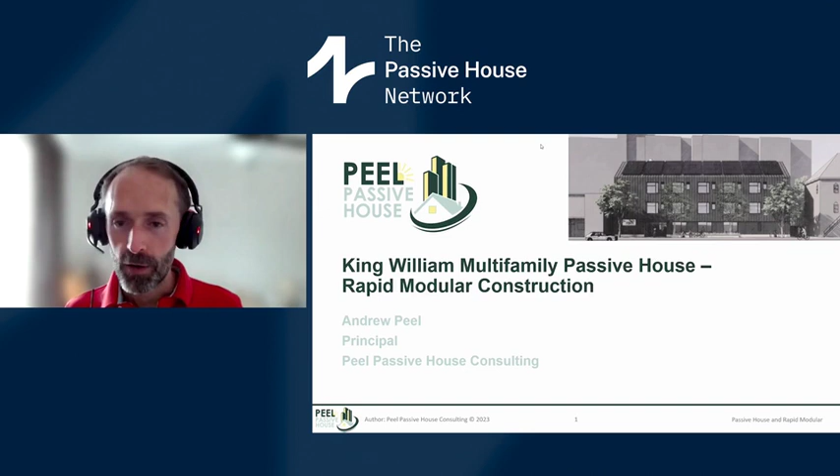I'm Andrew Peel, principal of Peel Passive House Consulting. Just a very brief background on us: basically we're a firm dedicated to the Passive House world in a consulting capacity, such as on this King William project. We're also a building certifier, we do a lot of training, and we've been working with manufacturers to evolve their products to serve a growing Passive House market.

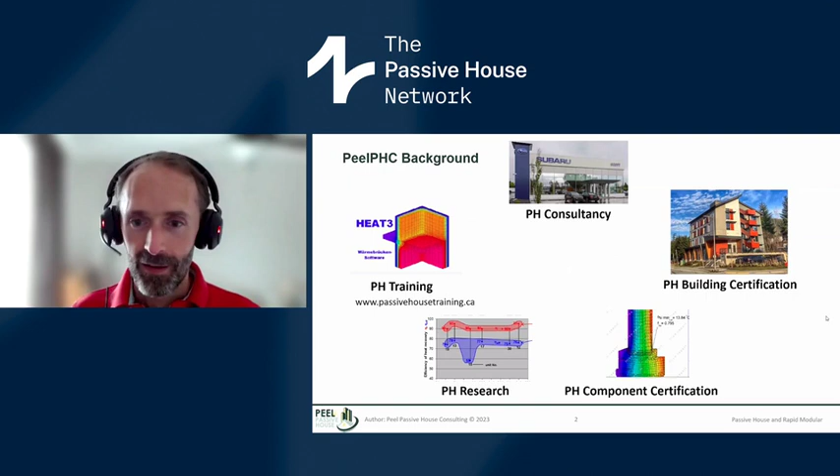So a little background on the project: the client is City Housing Hamilton, basically an organization of the city of Hamilton that provides affordable housing. You can see it's nestled on Lake Ontario, south of Toronto.

This project is a 24-unit, deeply affordable housing multifamily project, and you can see it's about almost 13,000 square feet. Design temperature for reference is actually 0 Fahrenheit. The architect is Montgomery Sisam Architects, a local Ontario architect.

Although I happen to be presenting the project, in terms of the Passive House side of things, I have to give credit to my colleagues, Kelly Fisher and Dave Fraser from my team, who were the main folks driving the integration of Passive House into the project. I get the privilege of presenting this project.

This project was part of what's called the Canada Mortgage and Housing Corporation. It's a federal government agency that provides financing, grants, and funding to projects, both affordable housing as well as market. They developed a rapid housing initiative because there's a dire need for housing, particularly affordable housing, across Canada, and they wanted to deploy a larger number of units quickly.

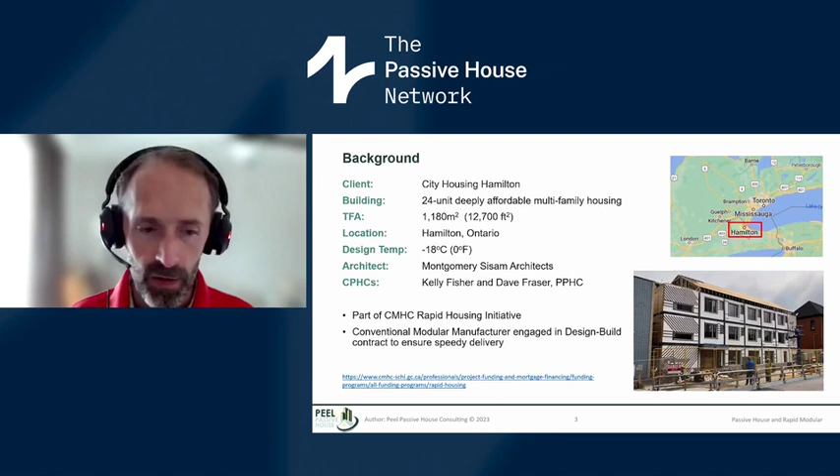For those who are interested, I've included a link to the program if you want to find out more. I'm not going to spend much time on the program itself, but the link is there for reference.

Okay, so just a bit of background on the design. It's a 3-story building with a crawl space underneath, and you can see the outline of the thermal envelope, which includes the crawl space. This happens to be ideally oriented north-south, just how the available site was laid out. You can see the south facade there, and the east facade there as well, with limited windows.

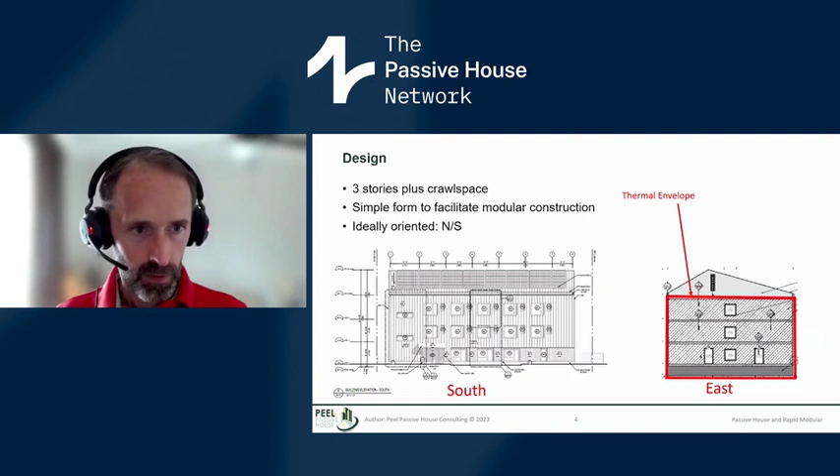There are some non-straight sections of the building, as you can see—for instance, a bump-out for the elevator. Also, the module with the entrances to the building is a bit shorter, but essentially everything's kept rectangular because it's modular, right? It's done in 3D, so we need to keep to a certain set of dimensions for the modules.

And I mentioned the crawl spaces within the thermal envelope—this was mainly so that we could run pipes and ducts that would be accessible for installation and any future work if needed.

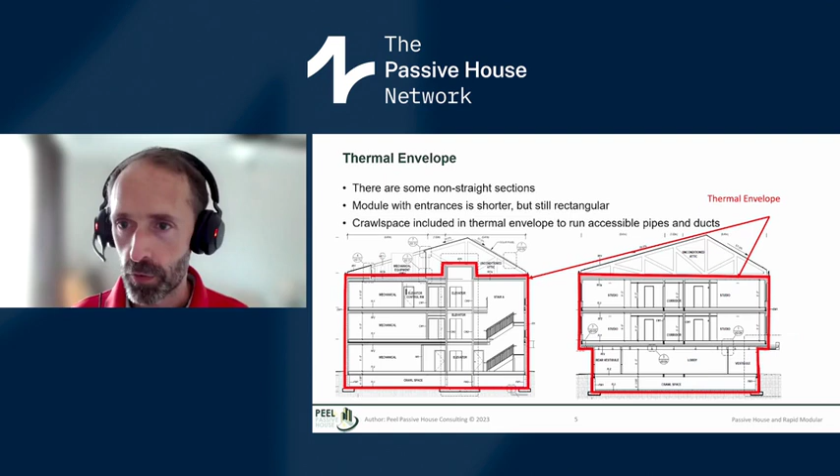Okay, in terms of the layout of the modules, there are 21 modules in total, 7 per floor. The way the floor layout works, we actually have 2 suites per module, split by an interior corridor. You can see the studio up here—this happens to be the ground floor with some amenity space.

There aren't actually dual suites within a module, but you could envision the studio module here flipped on the other side—they're all studio.

You can see they're quite compact. Again, this is deeply affordable housing, looking at rehousing homeless folks and people who are precariously housed—so it's a certain market segment that this type of project is actually serving.

The module widths vary from 10 to 14 feet, so fairly narrow, as you can see. From a shipping perspective, the modular manufacturer has indicated 12 feet is ideal, and they try to create as many of the modules as possible at 12 feet.

In this case, based on the design requirements and the service needs of the building, we ended up with a 13-foot wide module.

And then 14 foot for the space with the stairs, elevators, and mechanical rooms, and then the entrance one—the one with the entrances—is the narrowest one at 10 feet.

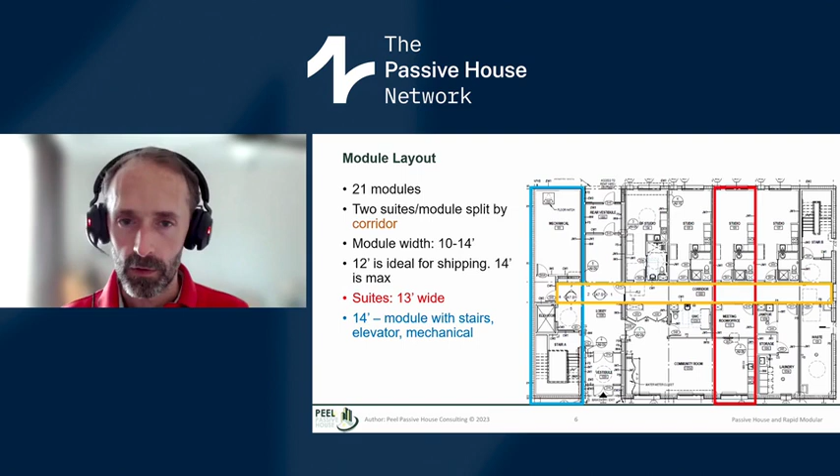As best we could, we wanted to stick with as many of the materials and processes that the modular manufacturer was already familiar with.

They already have their processes, and being a factory setting, they have certain QA/QC processes already, so we wanted to stick with those and just try to embed Passive House into them—insulation materials they're already used to working with, especially the folks on the floor doing the work, membranes, and so on.

Also, the division of labor between what gets done in the factory versus what gets done on site. Not everything can be done in the factory.

Even with modular, we'll see to what extent what was actually done in the factory, but there is a kind of balance between factory and site work.

Now, because these are modules and they're going to be transported, they actually have certain structural requirements. There's actually a separate CSA standard—anyone familiar with the Canadian Standards Association knows there's a separate CSA standard for this.

This applies to homes that are basically allowed to be transported as a home or part of a home. So we actually double up our ceiling and our floor—there's a ceiling and a floor per module, which obviously increases height but also adds extra timber.

But if you think of something with greater structural capacity like mass timber, the amount of timber used here is certainly a lot less than using mass timber. However, this extra timber does add extra cost to the modules.

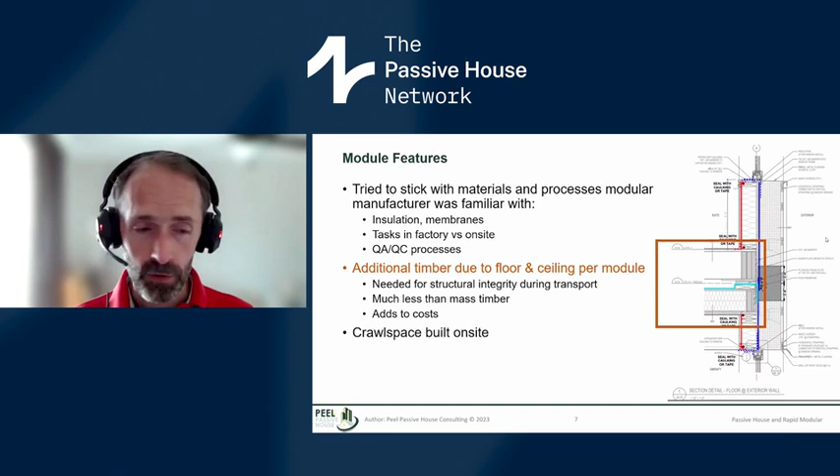The modulars, although they're very narrow, are actually flexible in terms of how you create space. You can create one larger space or room across multiple modules. So you can see here on the ground floor, there's a community space that actually spans 3 modules.

They design it in a way that they can have openings in the side walls of each module—they just have to add suitable structural reinforcement to make sure they can transport that.

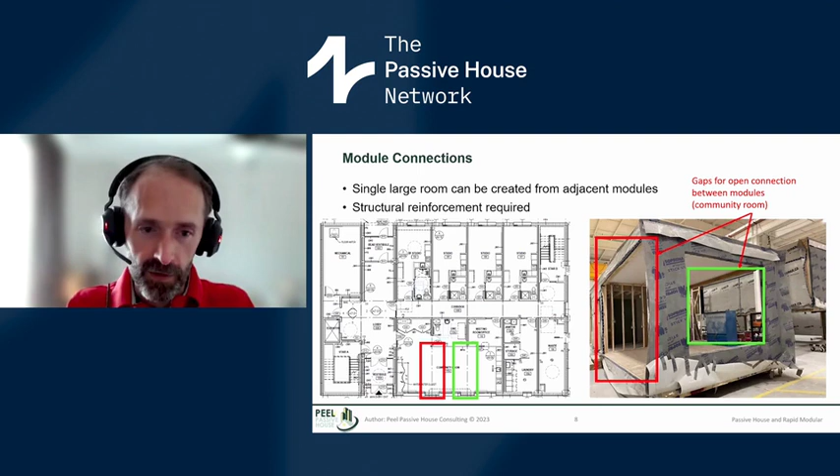So there is some flexibility—you're not stuck completely with narrow studio apartments.

Now, in terms of our planning, there's another layer compared to maybe a conventional Passive House project, because we have the modularity—the factory side of things.

And the on-site stuff. So there's coordination of, well, how do we ensure there's a smooth transition between the factory and the site.

And certainly there's, I'd say, probably more challenges than a panelized solution, where you're doing panelized walls or roofs. There's just an extra level of coordination, I'd say.

And so one of the things we did in planning—everyone knows the red line for your air barrier, indicating where that is. We go further with a variety of different layers to coordinate those, but also to distinguish what's done in plant versus on site.

So we know that the folks in the factory on the floor, they know they can look at this and say, okay, these are the things that are our responsibility that need to be done on site versus in the factory. And then it's clear what's going to be completed on site.

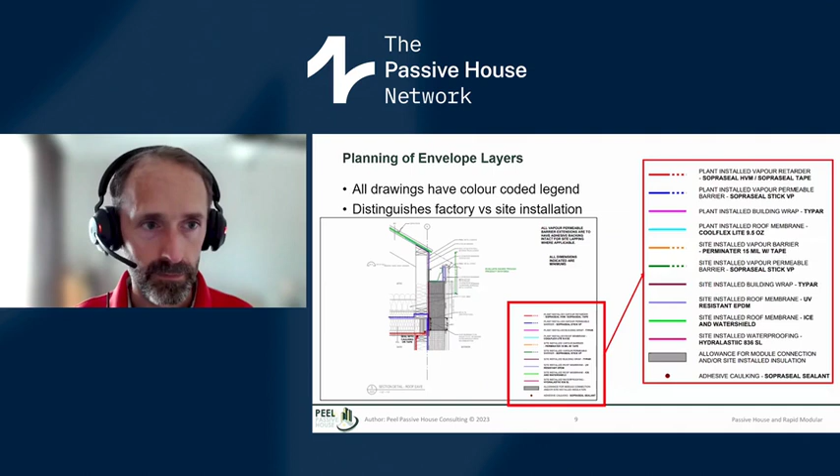One of the biggest challenges with modular is the panel to panel, or more accurately, module to module connection. You've got these modules coming together horizontally and vertically. How are you going to tie those in?

We're trying to do as much in the factory as possible, but we need to ensure that we get a good air seal, weather seal between each module.

So we had to think through this conceptually as well as practically, both in how they work in the factory and then what gets done on site.

The manufacturer can do full modules completed with cladding, delivered to site, which obviously if it's all clad, there's no opportunity to get in there and finalize sealing for air barrier.

So there was back and forth discussion throughout the team, the whole project team.

We landed on a solution where we would leave a section, for instance the area between two modules, where we have the insulation clear and accessible so that we can tie in the WRB.

The air barrier and WRB are one and the same material in this project, so we're able to access that, seal it on site, and then come and finish the installation.

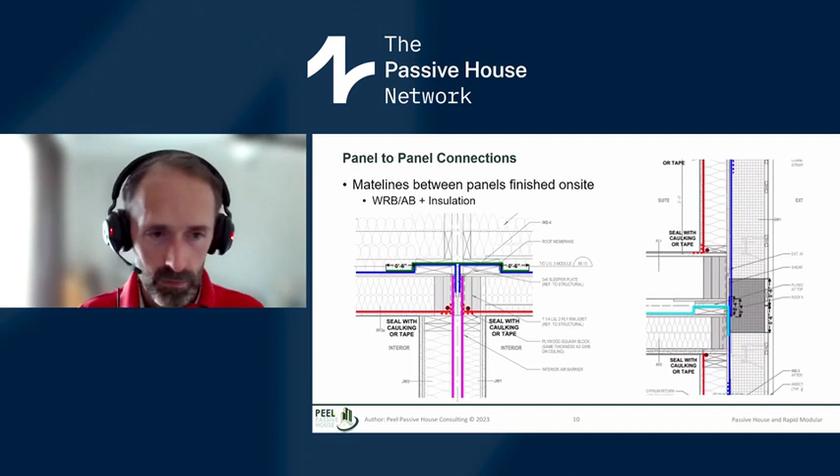We also have the roof matelines as well. You can see a kind of membrane that will come on top of that to seal up the roof after the modules are installed.

In terms of the building envelope solutions, this is the exterior wall, and we delineate what was done in the factory versus on site. From inside to outside, we've got drywall, interior vapor control layer, then our structural layer, 2x6 timber stud.

We use fiberglass batt insulation. Essentially, that's what the manufacturers are used to using, so they didn't want to change insulation.

We used a self-adhered WRB and air barrier on the outside of that. I did forget the sheathing layer in this - there is naturally a sheathing layer there as well that the self-adhered WRB is applied to.

We actually have an 8-inch prefabricated EPS panel, exterior panel, that goes on top of that. It's a PHI certified product. I've got a list of the various products we used on the project for those who are interested, on a later slide.

We actually worked with this manufacturer to help them certify their product, and we've used it before, but not in a modular capacity, so there was an interesting application.

You can see it's probably the cladding solution I've seen with the lowest amount of thermal bridging. It's got an integrated steel track embedded in the EPS layer, and this track is screwed to the wall, and then the cladding is attached to the steel track through a separate screw.

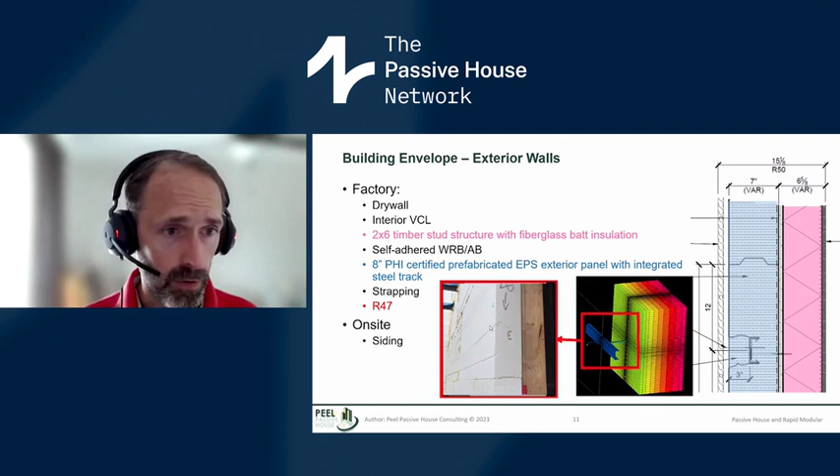Let's look at a couple other components. We've got the roofs. So the main section of roof, basically the structural part, ceiling joists, those are 8-inch joists, filled with fiberglass batts, again what the manufacturer's used to. Then we have 2 sections of roof.

Mostly it's a truss roof, and that's got 11 inches of blown cellulose at ceiling level on site. It's a ventilated, or vented, roof.

So that's our R65. And then there's a section of flat roof that houses some mechanical, like the condensing units, and that has an additional 9 inches of XPS for an R64.

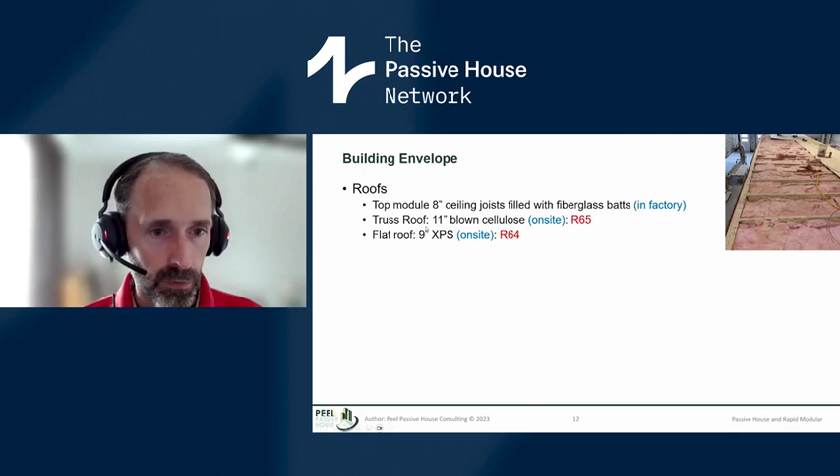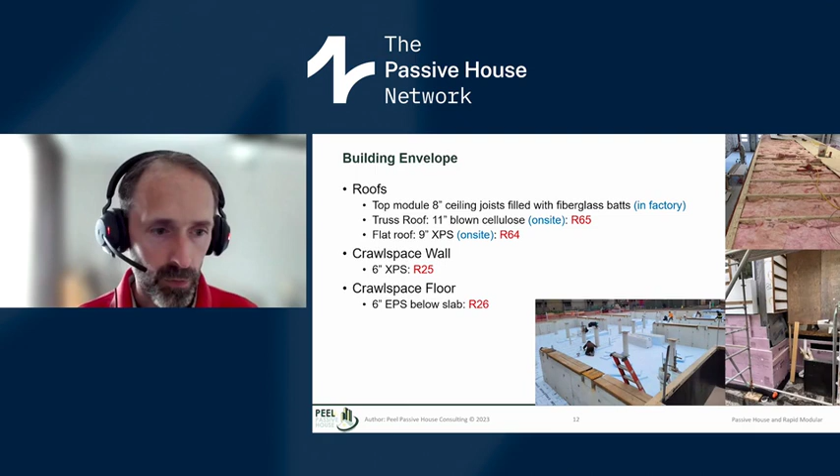Crawl space wall - this was originally spec'd as EPS, and then the manufacturer decided to change that to 6 inches of XPS for an R25 wall. The crawl space floor is 6 inches of EPS for an R26.

Thermal bridging - I mentioned the exterior wall system. So I've got the thermal bridging factor, and it's almost near thermal bridge free. The lowest, again, out of any cladding attachment system we've come across.

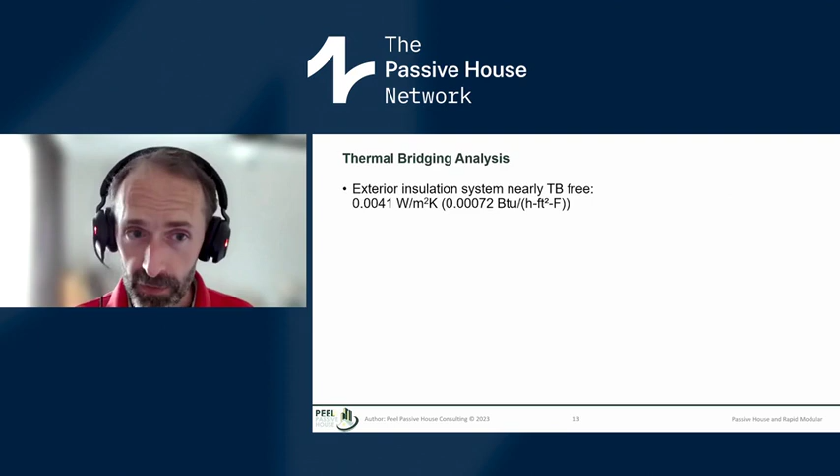And yet, despite using a passive certified system and modular construction, where we think we'll have some repeatable details, there was quite a bit of analysis and modeling we needed to do, which was maybe unplanned for. We figured we're using known systems, but just with the detailing we needed to work out, and it's the first time we've applied it in a modular setting. It was definitely surprising - 28 models in total.

Part of this was to optimize to meet our space heating demand. This project is going for passive certification, so I think there's definitely an opportunity here for some - we certainly learned some lessons through this project, and we could repeat some details. But the question, and this has been on my mind for quite a few years now, is: how many projects are repeating this process of detailing? And there's not a great mechanism yet for sharing details across the industry to really cut a lot of this work out.

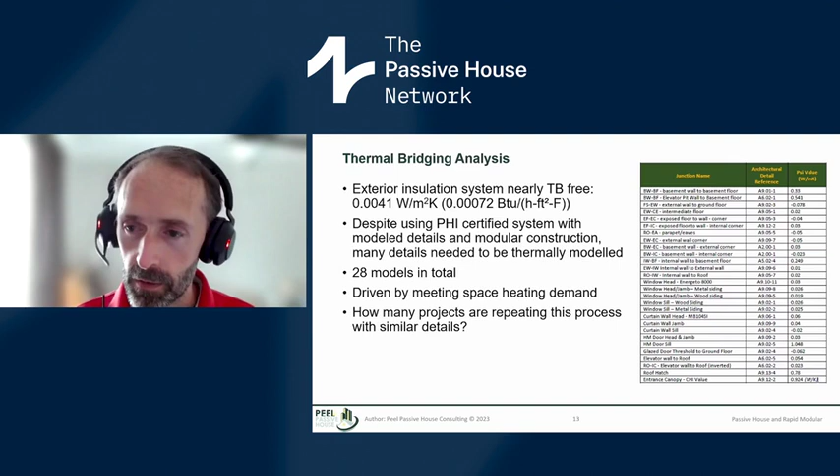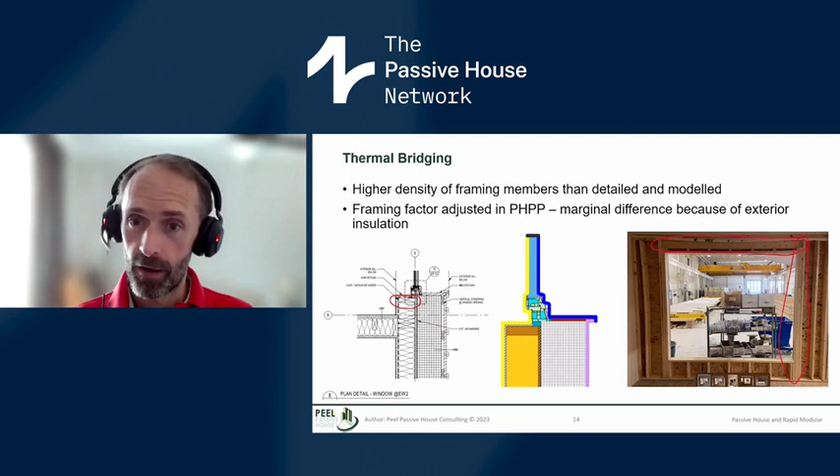And then just some things that come up with the modularity and the structural requirements. We plan out, we detail, we do thermal modeling, look at our insulation detailing, and then lo and behold, now they need to add some extra timbers for structure. Obviously there wasn't full coordination there. So we had to adjust our framing factor in PHPP to account for it. Luckily, with a big thick layer of exterior insulation, this doesn't have a big impact on our performance.

And also coordination with services - so do a thorough review of service penetrations. Again, lots being done in the factory, but there's this site work, a bunch of site work, right? And understanding what needs to be done, and what's important for air tightness, for instance.

So we have an example here of a sanitary duct going under the insulation in our slab, and there's no interaction with the air barrier, so we make sure the team's clear that this isn't something we have to worry about with the air barrier. Whereas we have this electrical conduit coming up through the floor, planned really close to the wall. When you're on site, are you really going to be able to get a continuous seal around that? So, let's go back and revise some details. These penetrations are definitely important.

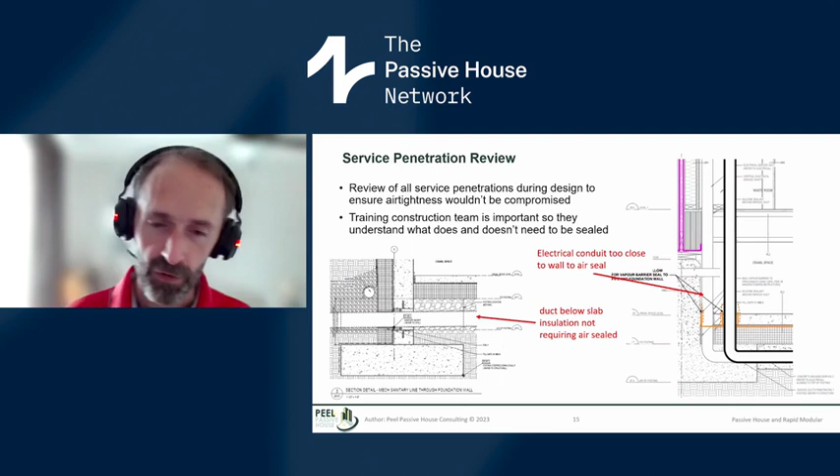And this isn't necessarily very specific to modular - it's kind of reinforcing a message here. But it's easy, as we'll see, because there are actually different teams working in the factory versus on site, so these things can easily be missed.

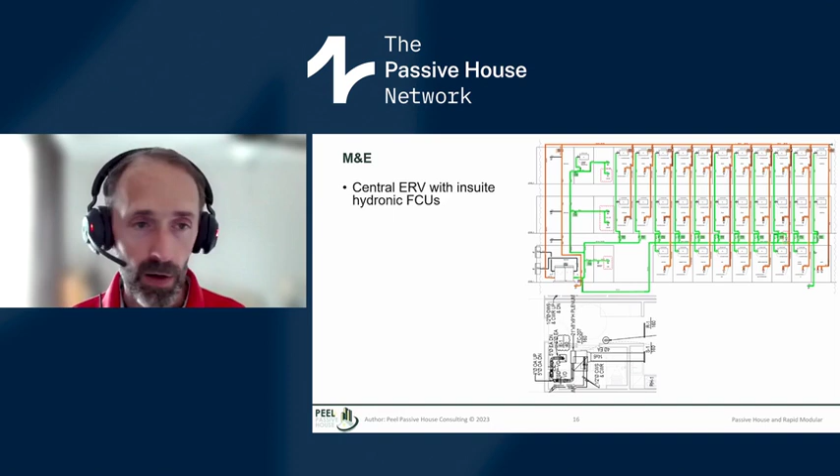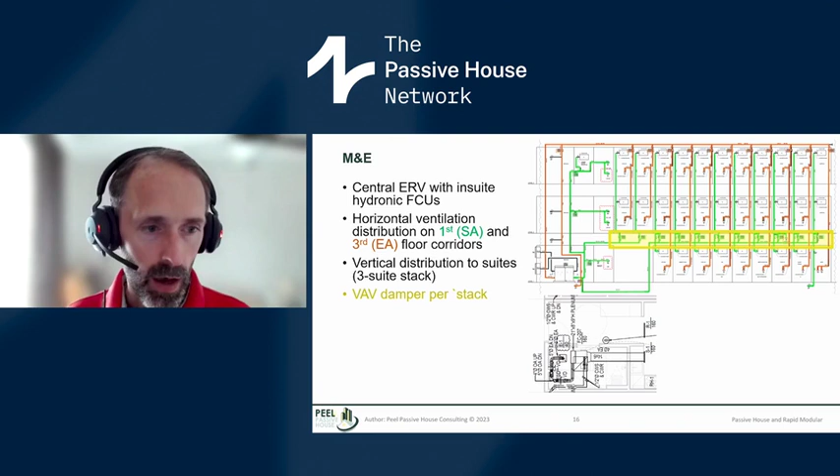In terms of our M&E strategy, it's a central ERV located in a mechanical room on the ground floor, and there's in-suite hydronic fan coil units, so each suite has a fan coil unit. The distribution has horizontal distribution on the first floor for the supply air, and then on the third floor for the return or extract air. Then we have vertical distribution through the stack - each stack of 3 suites has a vertical shaft that feeds each suite. We also have a VAV damper per stack to have some level of controllability of ventilation rates in each suite.

With the fan coil units, generally what we try to do is duct our ventilation air separately from the fan coil, so ventilation air just comes into the suite continuously with no interaction with the fan coil unit. The engineer basically wouldn't accept that as a solution, so they ducted it into the return air of the fan coil unit. This is a very common practice.

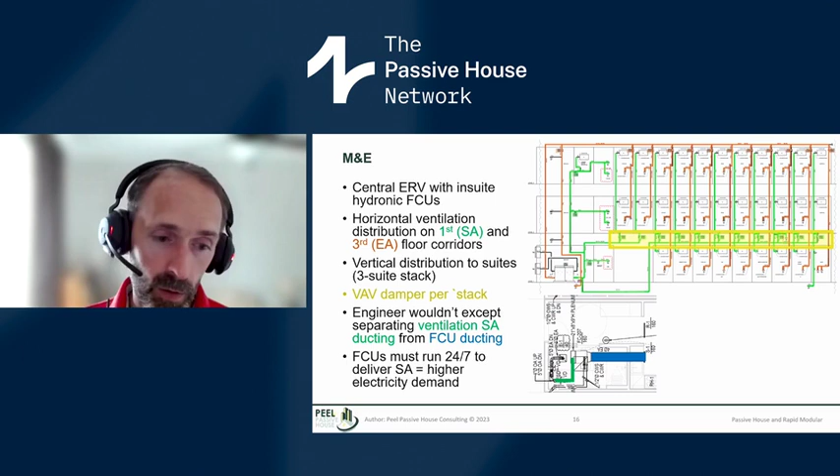The challenge there, as we know, the loads aren't very great in Passive House. We're not running the fan coil unit all that often, but we need to run the fan in order to deliver the ventilation air into the suite. So what we end up with is a bit of a parasitic energy load where we have to run that fan coil unit 24 hours per day, but maybe half the time, who knows exactly how much, but quite a bit of the hours of the year we wouldn't actually need to run it, but we do in order to deliver ventilation air. So definitely a suboptimal solution there.

In terms of the component breakdown, I won't spend a lot of time on it. Numerous of you out there will be familiar with some of these products for sure. But it's all electric, right? With a chiller, we've got a CO2 heat pump.

The odd thing, and this is another engineer-driven thing, we would have used an air-to-water heat pump to provide heating and cooling through the heat pump, but the engineer didn't want to do that. They just wanted to have a chiller. So we have electric heaters inside of the fan coil unit. It's a bit backwards in my mind - I've got electric resistance heat. So, yeah, another suboptimal point, but not something we could move the engineer away from, unfortunately.

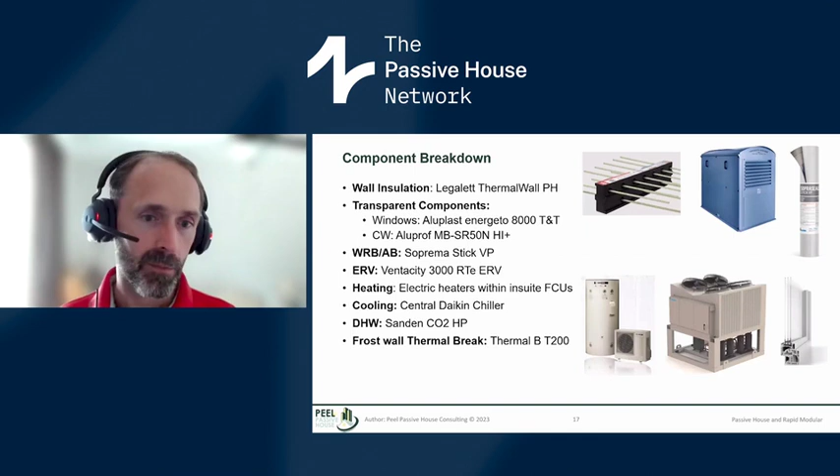I wanted to point out our energy modeling approach, which we've been evolving over years to streamline the process. We've developed a pretty streamlined method, though there's still more optimization that could be done. We bring in a model from Revit, a 3D CAD export, into SketchUp, build a design PH model around it, and export that to PHPP. This works great for our internal workflow and also for certification as a way of documenting the project. It's a clear connection between the architectural model and the PHPP.

My colleague Kelly, who I mentioned earlier, will have already presented at the conference in an earlier session entitled 'Making a Better Crystal Ball.' If you have the opportunity to watch that, I'd definitely recommend it—she gives a bit more detail on this process.

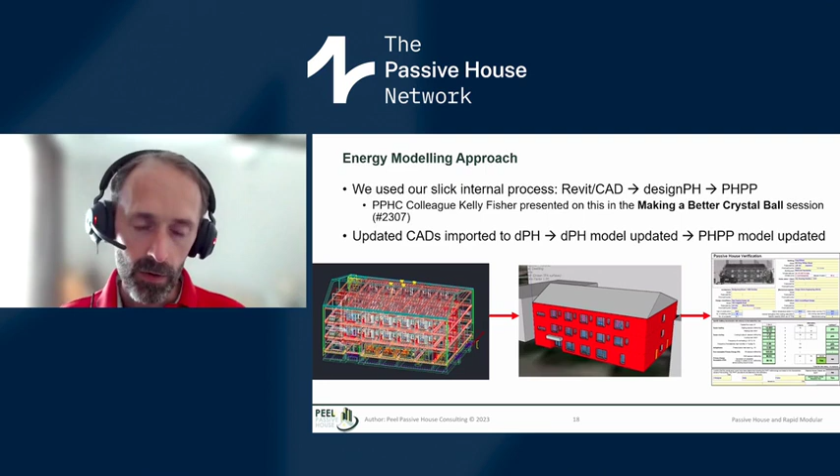What we can do is, if there are updates to the CAD or Revit model, import that into SketchUp and identify where the changes are, then make the updates in designPH and export that into PHPP—instead of trying to figure out what's changed, which architects may tell you, but they may not tell you everything.

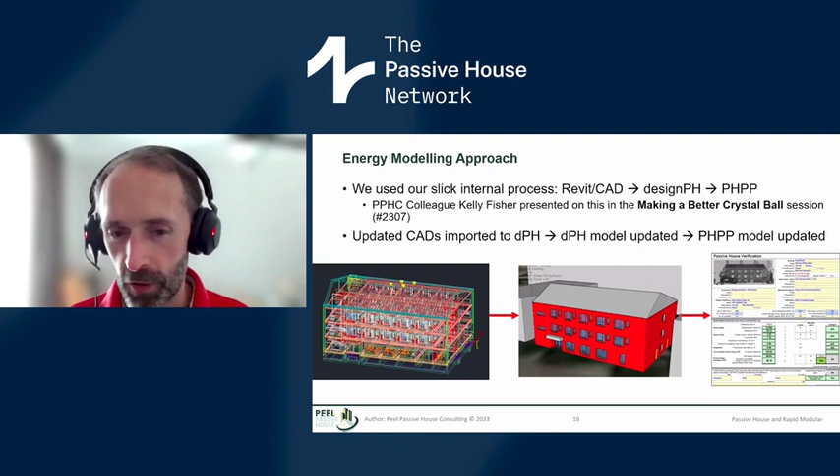A key thing on many projects is ensuring the team understands Passive House requirements and processes. During the design phase, we provided virtual Passive House training for novice design team members who hadn't had any Passive House experience, including on the modular production side—like the production manager—so they could understand Passive House and provide feedback as part of the design team. It's like, 'okay, this is how we do it in the factory—how's that going to influence our design?'

We also provided in-factory Passive House training, a day-long session for key shop personnel prior to work beginning in the factory. One thing that was amiss on the project relates to how it's set up for construction—the modular manufacturer is the prime on the project, leading everything and hiring the architect and consultants, but they also contract the site work to a separate GC. That constructor had no Passive House training, which certainly caused some issues. That was a gap in the team's knowledge, and an oversight on all our parts to not include them in the training.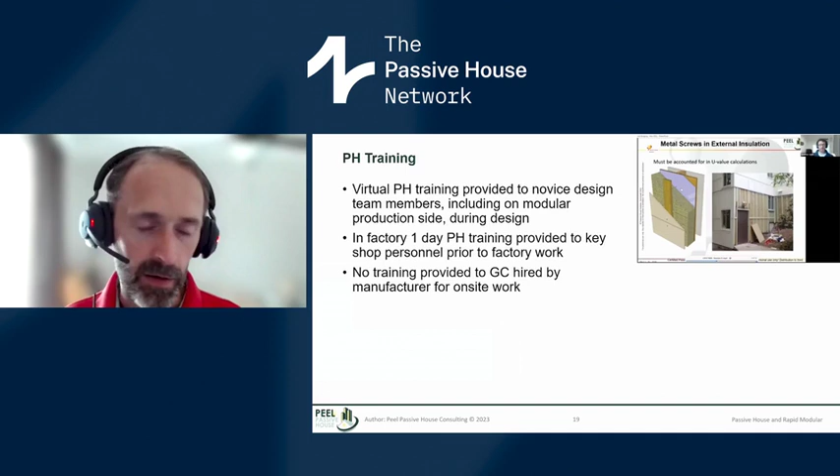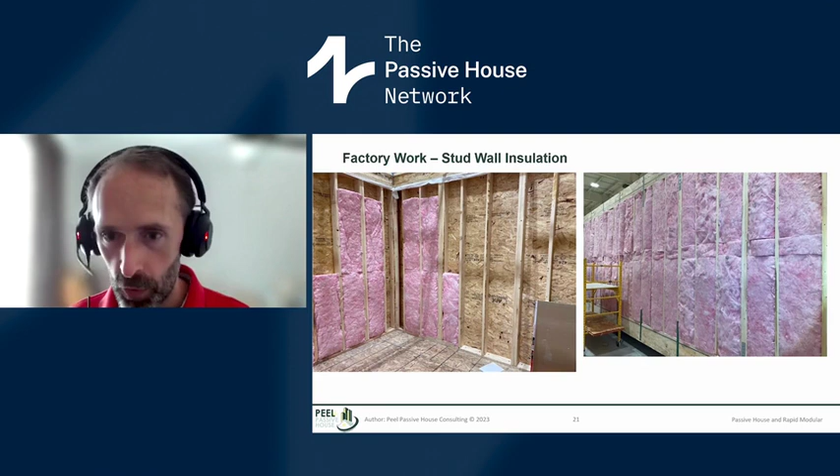In the factory, here are some highlights. Their conventional approach uses fiberglass between the studs, so no change there for them—nothing special, though obviously we want to make sure the cavities are fully filled. Here's a look at two sides of different modules to give you a sense of things.

You can see here the Soprema product, which represents the exterior wall—that's our WRB. This is a demising wall between suites, which is also wrapped, which is interesting. You might wonder why you'd wrap that—well, one, they compartmentalize every suite, so that provides compartmentalization, and they also use the wrap for temporary protection as they're moving modules onto the building site.

Our strategy to make the mate lines between modules work involves overlap of membranes. We try to ensure that in certain sections where it's a bit questionable, we go back and address that, but we have enough extra membrane along all edges to overlap the modules, both horizontally and vertically, on site. You can see here on the exterior wall, it's just a typical WRB wrap.

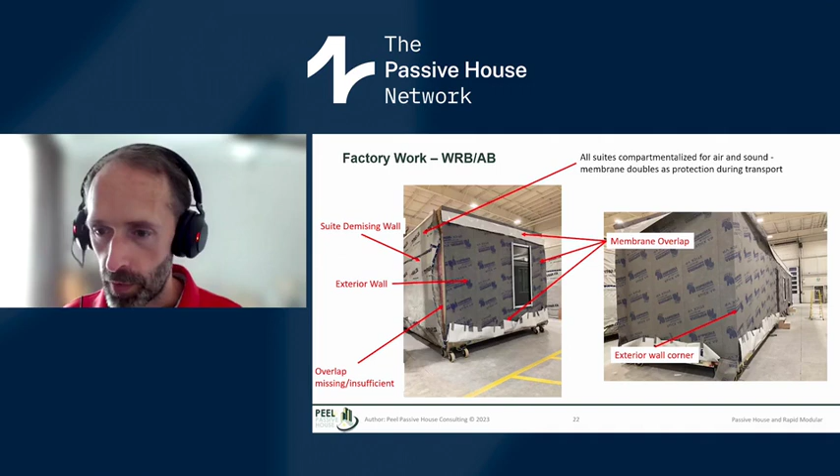Window detailing—there were some issues here, which came down to miscommunication about the order of operations and what the requirements actually were. We have our sill flashing here, which happened to be applied all the way around the window.

Waterproofing flashing was intended just for the sill, but in terms of order of operations, they actually put the window flashing on first and then overlaid the WRB over top of that. So again, there's a bit of a misunderstanding on the purposes of the membranes. In terms of detailing, the window actually sits slightly cantilevered, or proud of the stud wall, to get it a bit into the exterior insulation layer.

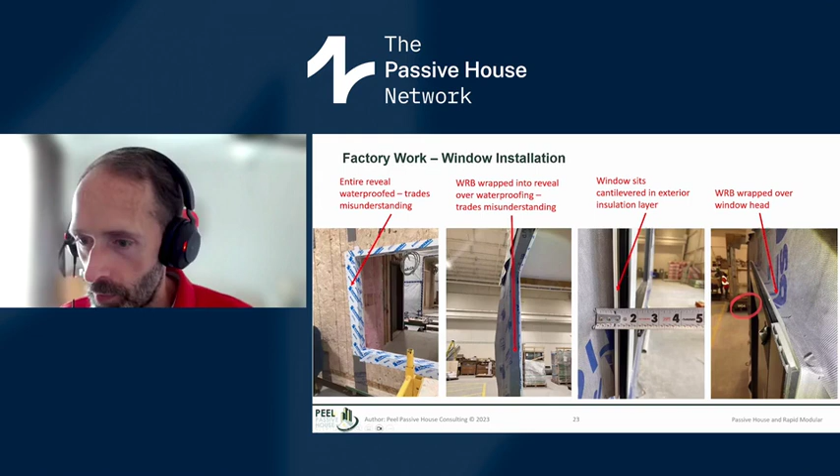I can see your detail of the WRB wrapping at the window head.

The windows were also installed in the factory, and after they'd done the first mock-up, we had a third party come in and do a seal test around the window, and it passed with flying colors. It might be difficult to see in the picture, but they're using a smoke pencil, watching that the smoke is basically floating around, not being sucked in or blown away from the window. That was our one window mock-up.

They weren't going to be testing every window, so the manufacturer's QA/QC processes are critical to ensure all these windows are replicated as such. The factory build can go quite quickly, so you're not necessarily getting a third party or other project team member in to check the consistency of all the windows, so the manufacturer's processes are quite critical to this.

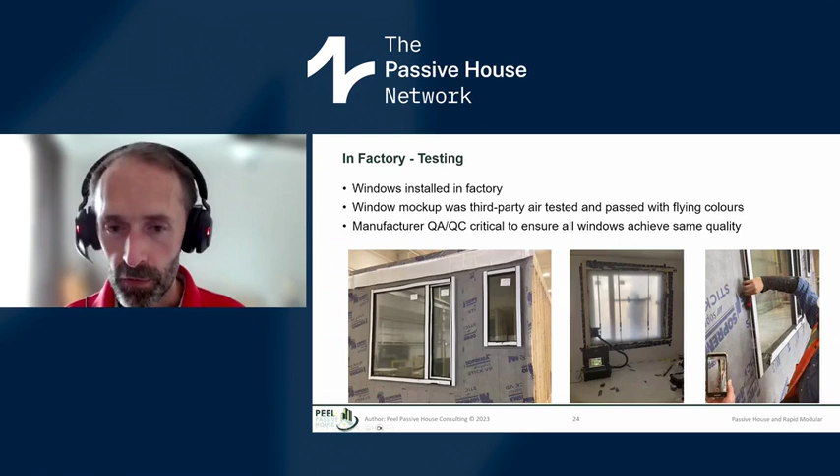Then some other miscellaneous details: a lot of the mechanicals were installed in the factory, so you can see the piping and duct work here. I wanted to highlight this because it's often missed on passive house projects - we have pipe with a thermal bridge-free hanger, with insulation, and the hanger separate, so they can continue the insulation all across the pipe, which is wonderful to see. Here's an example of a VAV box installed in the factory.

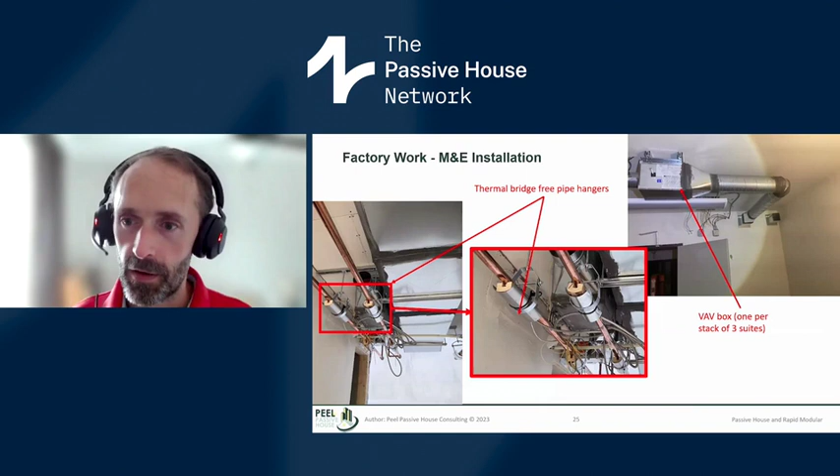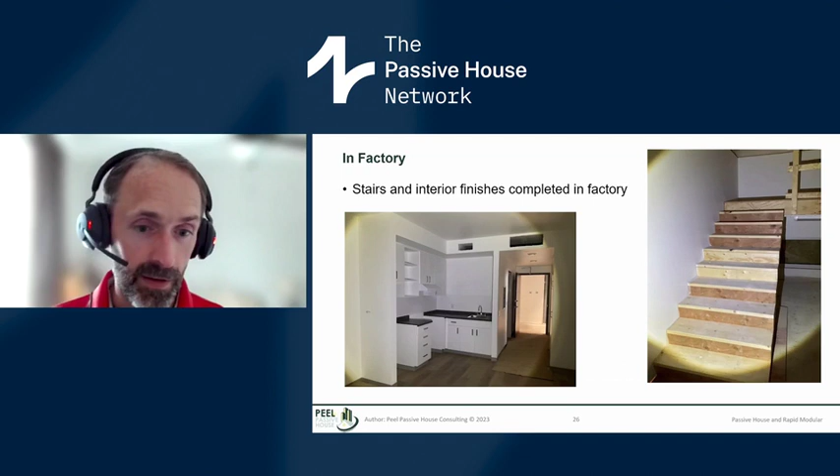Even the interior finishes and the stairwells and stairs are actually installed in the factory. The idea is to basically minimize as much as possible the site work.

Just a little insight into the actual process or work in the factory: the modules are put on wheeled elements, not lifts per se, so they can move through the factory. They have a whole process - I think they have four lines in the factory, so four modules can be worked on at the same time, with stations where they can lift up the modules.

This is actually great for the workers - plumbers, electricians, instead of bearing down the whole time, are actually able to work from below. They found that from a worker health and safety perspective, or a kind of longevity of work, that works well for them.

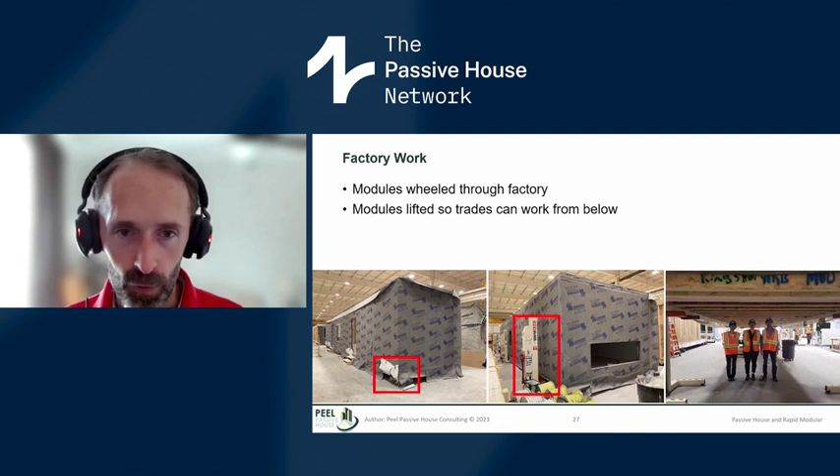Then some insight on the on-site side of things. One thing that got missed during design: we had where the sewer invert was, with a long sanitary pipe running the length of the building. We ended up realizing this was going to penetrate into the insulation layer and be awkward to lay out, so we had to make sure we added extra insulation below the pipe, because it was higher than planned.

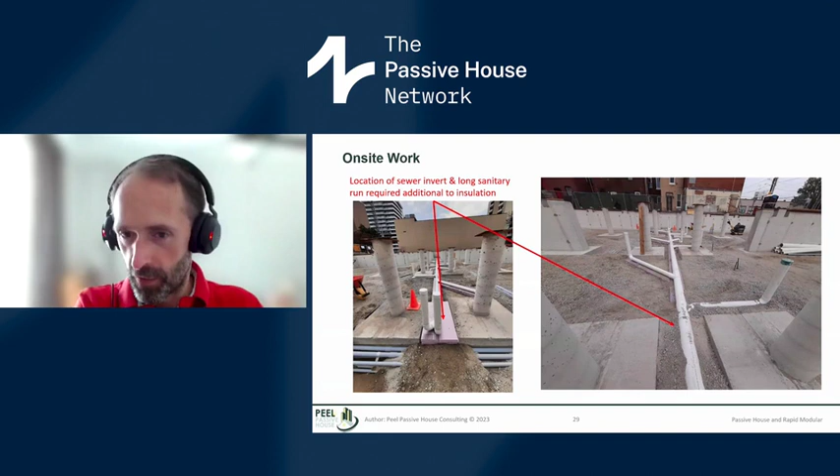Actually, I think the other end was lower than planned. So we just needed to make sure we were getting insulation underneath all of that pipe, and not getting any major breaks in the insulation all along this pipe.

Here's the crawl space being constructed. We do have some thermal bridging, both point thermal bridges with these columns as well as supporting structural walls. The engineer didn't want to put any insulation underneath the footings - I'm not sure exactly why, whether that was soil conditions or something else - so it's just something we had to deal with in the energy model.

And then the crawl space wall was actually insulated after the modules were installed.

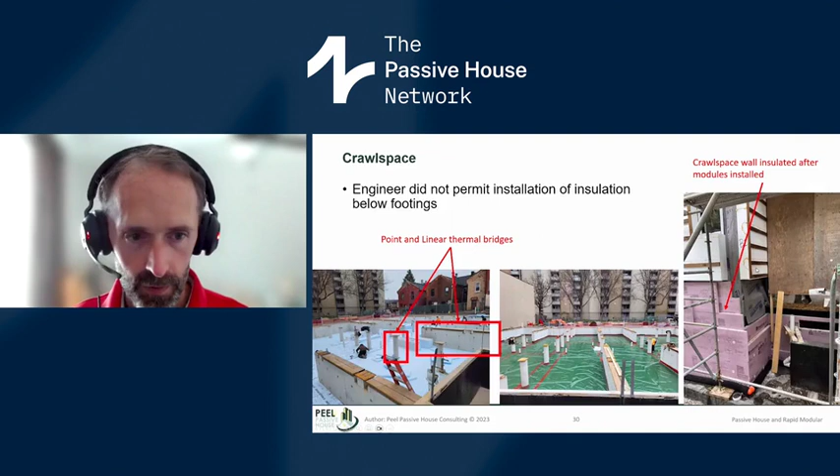Here's just an overview - they had a little time-lapse camera on an adjacent building from the start, once they were ready to bring modules in. You can see the first module coming in here, ready to be craned on site - that's day 1 of our module installation. You can see what they've done by the end of day 1 through day 4, and then by day 4 they had all the modules installed, as well as some of the roof trusses laid out.

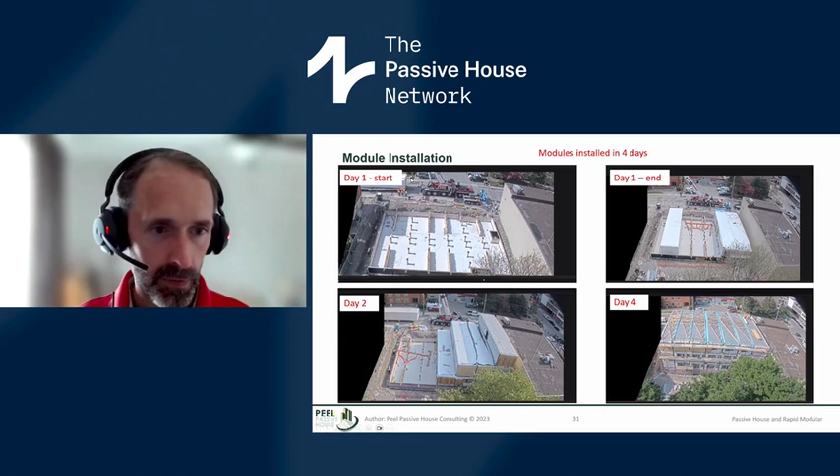One of the interesting things that came up during factory production was we have EPS on the outside. They shrink wrap every module before shipping to protect them from weather, and they keep them shrink wrapped until they're ready to bring them onto the building. But they couldn't shrink wrap exposed EPS, it would melt. So what they had to do is temporarily cover the EPS with some OSB to be able to shrink wrap it. That OSB is removed later on when they're ready to apply the cladding, and I've got some photos showing that.

They also have some membrane on the roof for protection, so this could be like an EPDM membrane, so that if a module is left exposed and it rains, it's protected as well.

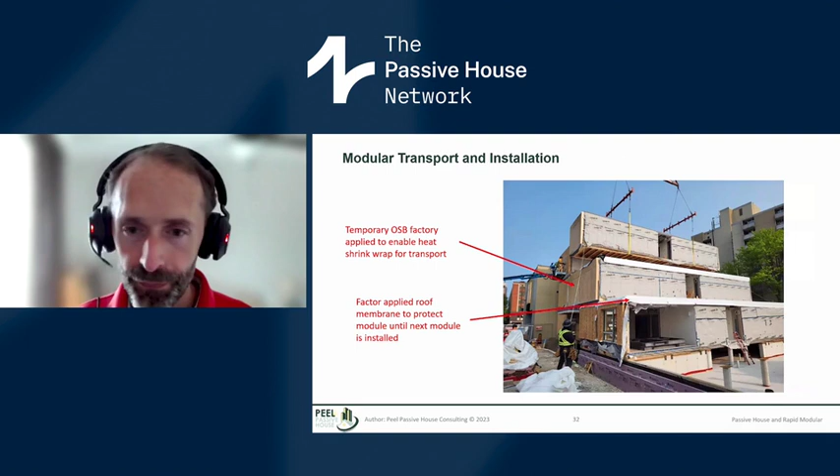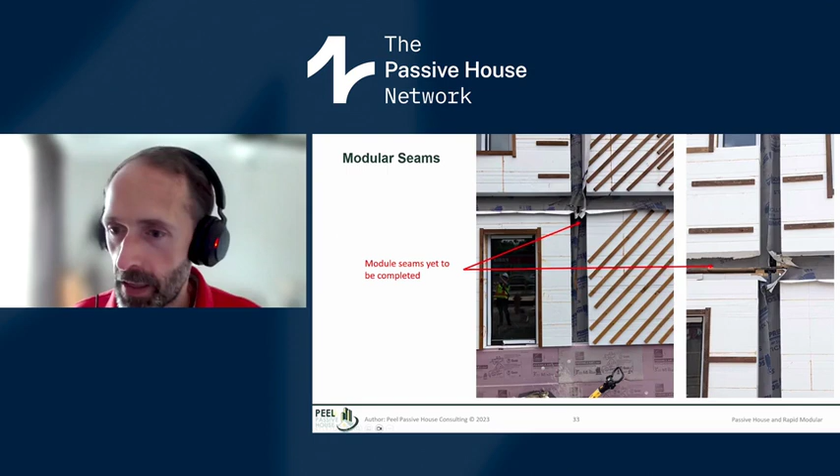Here's an example of our modular seams, not completed. So modules are installed, but they obviously need to go back now and, as planned, finish those seams.

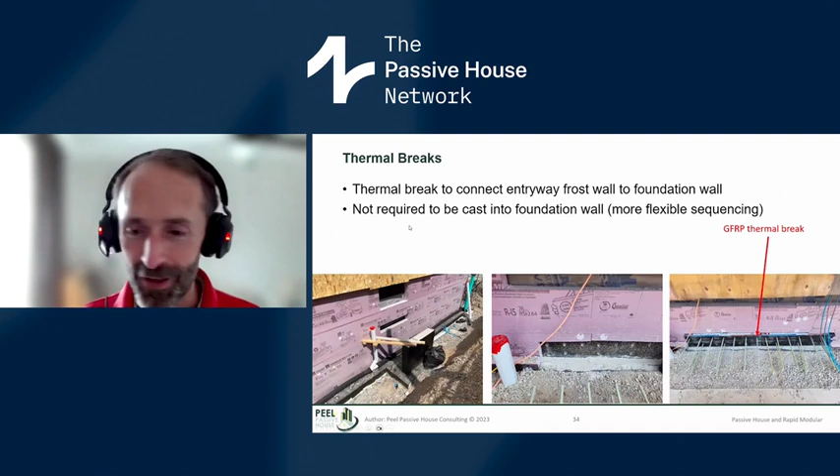Just a little note, we didn't have much thermal break, just a couple at the entrances. We've come across a newer product for thermal break that's GFRP reinforced. A nice thing about this product is we don't need to cast it in the foundation wall. We can have the wall built, then drill into that and place this and cast it in at a later point. From a sequencing perspective, because of that, the foundation wall was done and they hadn't ordered this product, we were like, oh, what's going on? They said, no, it's okay, we can add it in afterwards.

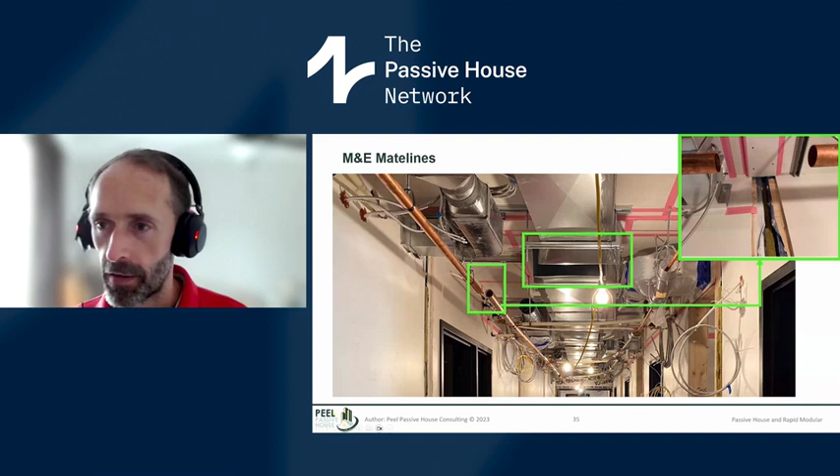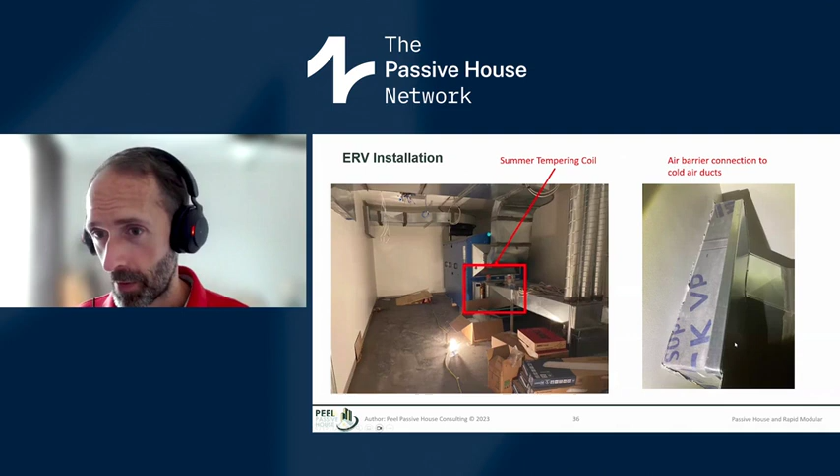ERV installation, this is the room. It's pretty straightforward, they do have a coil. This is another odd thing with the mechanical design, we have cooling in each suite, but they decided to have a cooling coil at the ERV as well, bit redundant I think. And then we're making sure that our exterior cold air ducts do connect with our air barrier as well, for continuity of air barrier.

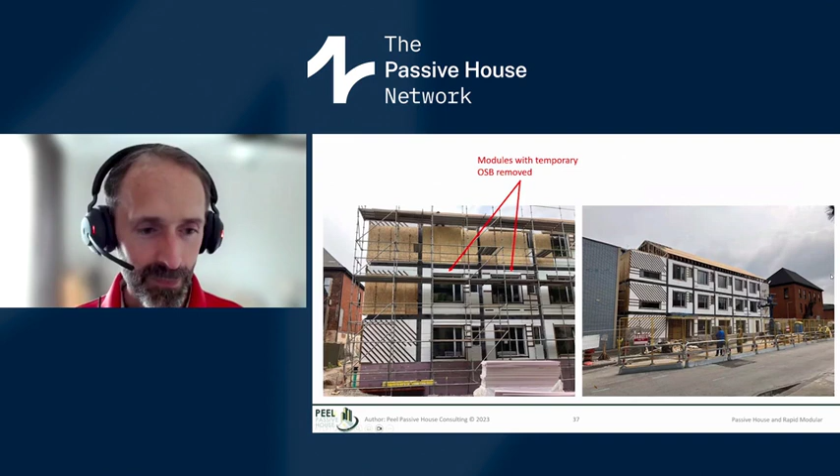Here you can see the difference between the OSB that's still covering the EPS on some modules, and then with it removed. This project was meant to be finished a while ago, and unfortunately, as of this date, it's not finished, so this is the latest photo I have of the project. Hopefully by the time this airs, we'll have it completed.

Just some summary notes here with coordination. One of the things we didn't appreciate is the modular manufacturer had quite a high turnover in the shop. Numerous workers aren't highly skilled and tend not to stick around often. Plus, the important passive house information wasn't consistently and universally communicated to the trades folks, which led to some misunderstanding of requirements, as we saw with lapping and order of sequencing for membranes.

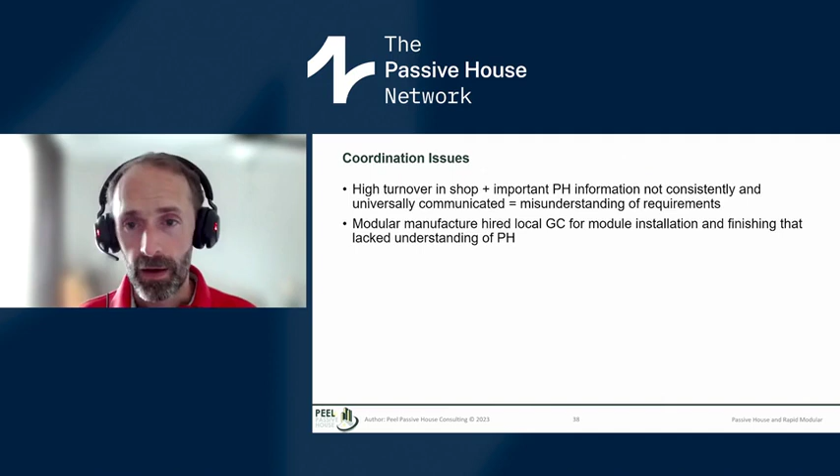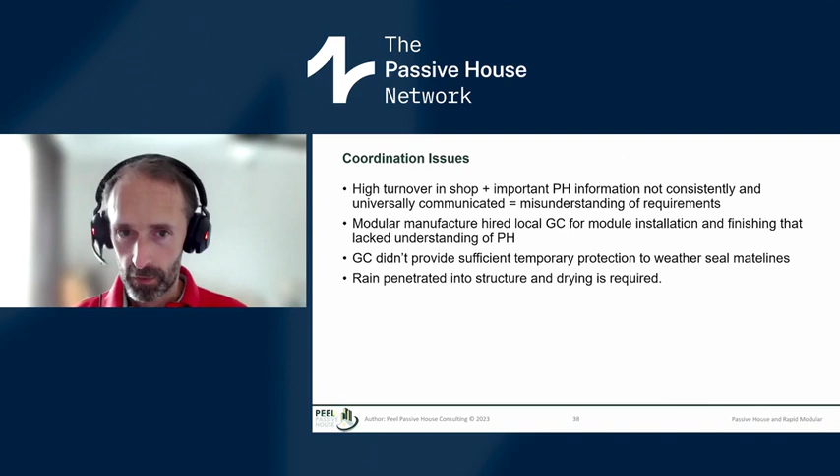The modular manufacturer hired a local GC for the modular installation and the finishing, and again we didn't train them, they didn't have an understanding of passive house. That proved problematic, because one of the things they didn't fully appreciate, even though it was communicated to them, is that the mate lines need to be sealed right away once the modules are in place. That wasn't done, and unfortunately we did get some rain penetration into some of the modules, so they've had to work to dry that out. It's a clear coordination issue that's come up, unfortunately.

In terms of lessons learned, modular passive house is an emerging area but not yet huge. We're still developing details, but we really need to establish repeatable details that are widely applicable.

So we don't get every team reinventing the wheel over and over again, we need input from a passive house contractor. The modular constructor knows their thing, but there's sometimes a disconnect with the site work.

To some extent we can use existing details, particularly passive house certified systems that have thermal bridge modeling done, but those have needed to evolve.

So there's work to be done to transfer lessons learned, or more than that, just detailing across the industry. This has been missing, and I've been wanting this for a while, and I know others have, but it hasn't happened yet.

So this is another call to action: creating a central database of passive details and thermal bridge models. We're basically spending a lot more time in design than we need to, I think.

If we want to scale passive house, even in a modular context, this is clearly important, and it's not being done to a sufficient degree.

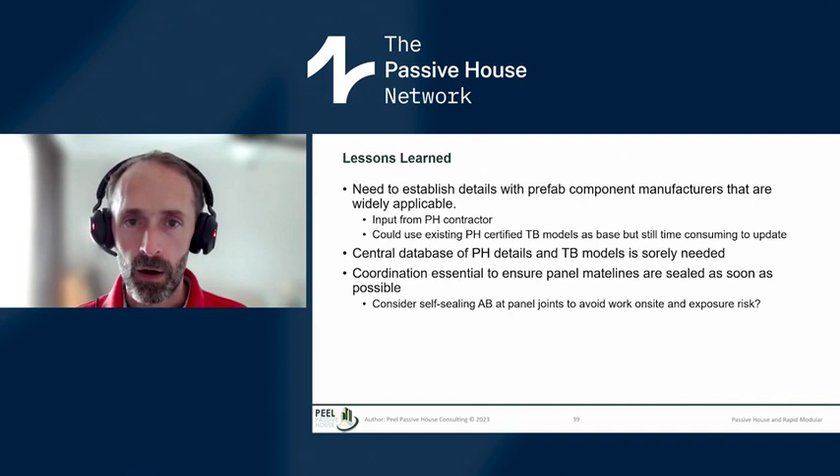We don't need to do extra on-site work, limiting this exposure risk. I don't have a specific solution for that, so it's another call to action point, but it's something worth investigating.

And really, passive house training for everyone involved — we missed the GC crew unfortunately — as well as a turnover plan. If we're going to have high staff or tradesperson turnover, we need a plan to deal with that.

It's an interesting thing because we've had numerous activities in the prefab space, particularly around prefab panels. Often what I've seen is somebody new coming into the market saying, 'I'm going to create a new passive house panel,' starting from scratch with passive house in mind and designing everything around that.

But it's very different to take a conventional prefab manufacturer and upgrade their processes and skills to get to passive house. It's like taking an older tradesperson who's been doing it for 30 years — changing their methodology and thinking can be challenging sometimes.

So it's maybe a bit of a different thought or approach needed in trying to bring conventional prefab manufacturers into the passive house space.

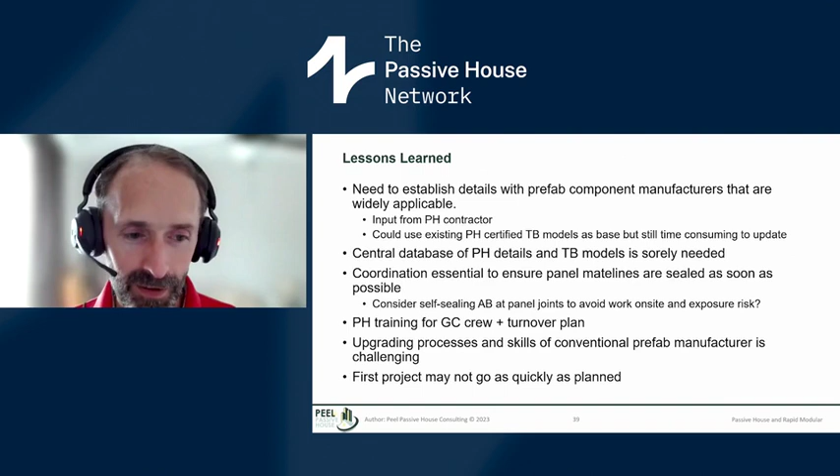And on the first project, even with rapid modular construction, it may not go as quickly as planned. This was intended to be completed and occupied a little while ago and still isn't done, so some challenges there to overcome for sure.

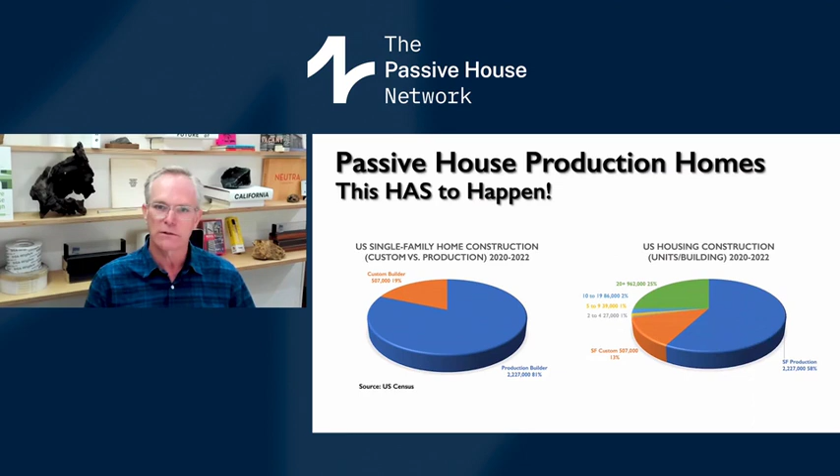We'll talk about the economic challenges and opportunities here, but this isn't something we can ignore if we're going to get our built environment where it needs to be in terms of sustainability and performance. In terms of economics, the huge challenge with production building is first cost, because it's a very competitive industry and sale price really drives a lot of it.

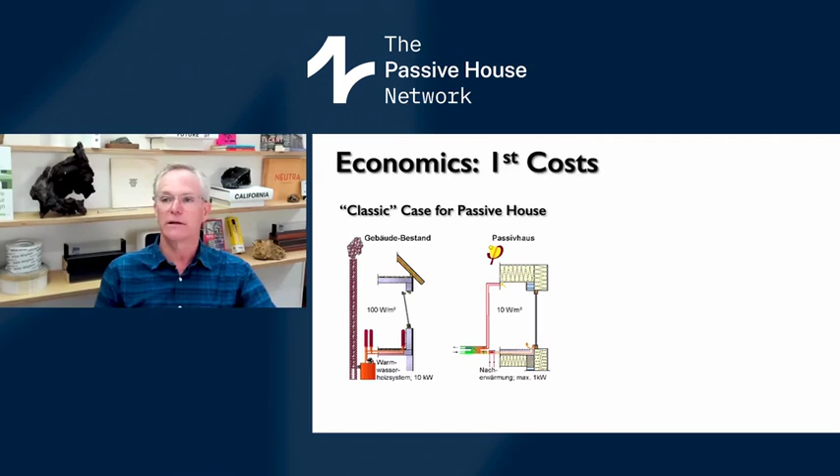This is a graphic I borrowed, the classic case for passive house. Basically, in a German multifamily dwelling, there's a boiler system for heating. If you build a better envelope, you can eliminate that. As I understand from colleagues in New York, that actually applies there too. Getting rid of the boiler system is a huge benefit financially.

Unfortunately, for production builders in much of the US, this is the kind of mechanical system for heating and ventilation that's in these buildings. A forced air furnace like this is maybe $3,000, and then the ventilation system, if there even is one, is a bath fan running all the time. Our present proposition is to replace this with some kind of heat pump and replace the bath fan with a central ventilation system. So the first cost argument is a tough one to climb.

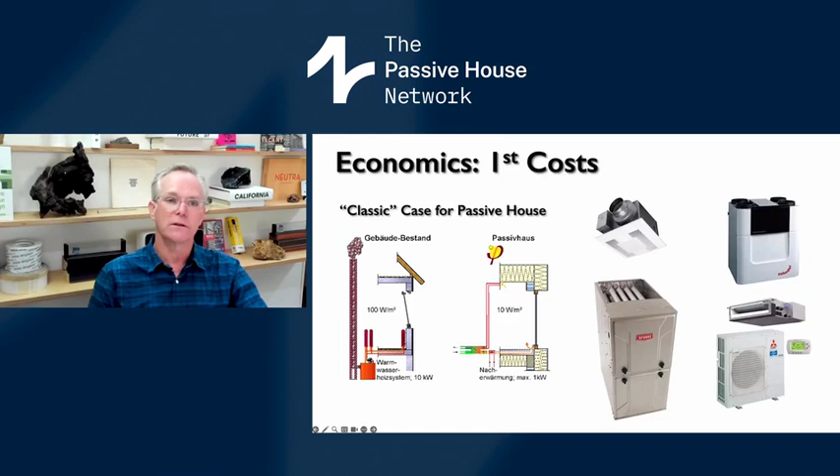But beyond just the first cost, there are other issues coming into play that I don't think have been really explored yet, and I'm confident are going to make a huge difference in the future, particularly around the economics of the grid. As the energy grid goes to be 100% renewable, storage is a huge factor. People have probably heard about the duck curve, and now there's talk of the falcon curve. I don't know how many other birds we're going to bring into the discussion, but it's all around the intermittency of renewable energy.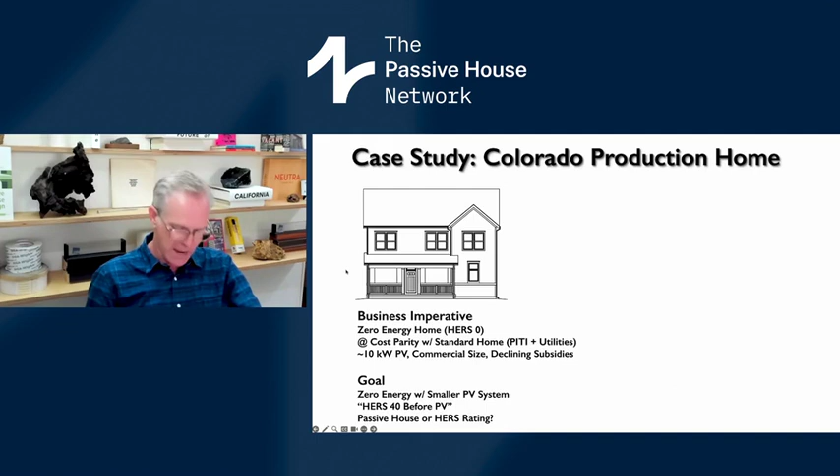Their goal was HERS 40 before PV, and they hired me to do passive house consulting on this. Part of my process involves a lot of very careful optimization and sensitivity analysis on building shells. The builder had attended a training I was doing and found this appealing, so they contracted me to take their building and see what I could do with it in terms of bringing it up to a passive house standard.

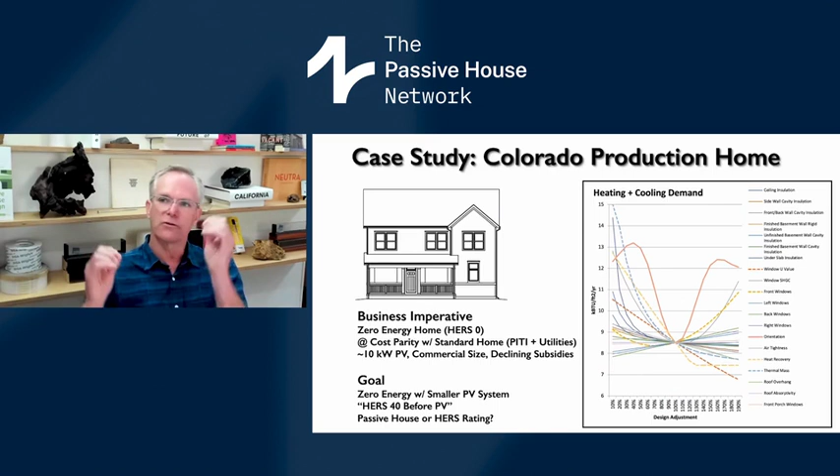This was kind of where it started, and this is when it was optimized to passive house. This is showing actually heating and cooling demand combined. I also do that because I want to make sure I'm not driving one up in favor of the other. Anyhow, these were the final results.

I'm not going to go through all the detail, but you can see that they had a HERS rater also generate a HERS 40 score building in parallel with the passive house. And you can see the heating demand: the HERS 40 home did maybe a 40% reduction from the reference home. I got about a 90%, which is what we expect, what we come to expect in passive house - like a 90% reduction in heating demand.

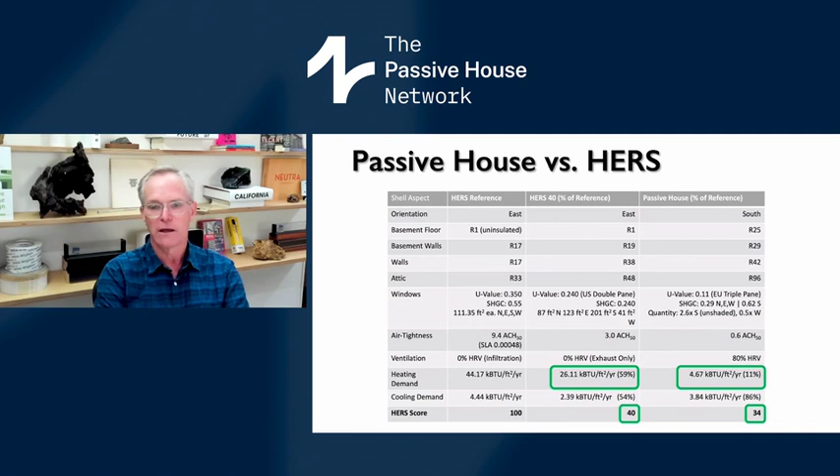But when you look at the relative HERS scores of these two buildings, the passive house got a 34 versus a 40. So much higher performance, much less energy use on heating in Colorado, which is a very heating-driven climate, but very little difference in the HERS score. I went on to try to figure out all this, and part of it has to do with the HERS metric, and as I mentioned, the politics of things.

In passive house, in the classic case, source or primary energy is pretty clear and easy to calculate. The HERS normalized modified end use load - apparently, part of the process of developing the HERS score, the natural gas industry was concerned they'd be disadvantaged by heat pumps. So somehow they came up with this equation, which probably only a lawyer or lobbyist could love, scoring the energy based on how the actual building compares to the best possible available equipment of gas or electricity separately. It's all kind of engineered to make sure gas is not disadvantaged.

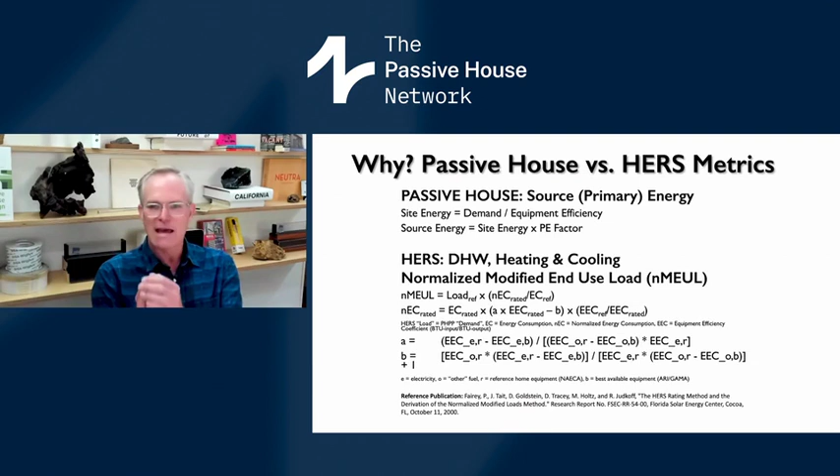Next case study, looking at California code versus passive house. I was very interested, and remain interested, in getting wider spread adoption across California, which has 16 climate zones. So I did this study some years ago comparing the performance of a prototype, sort of state prototype single family home, to passive house in all 16 climate zones.

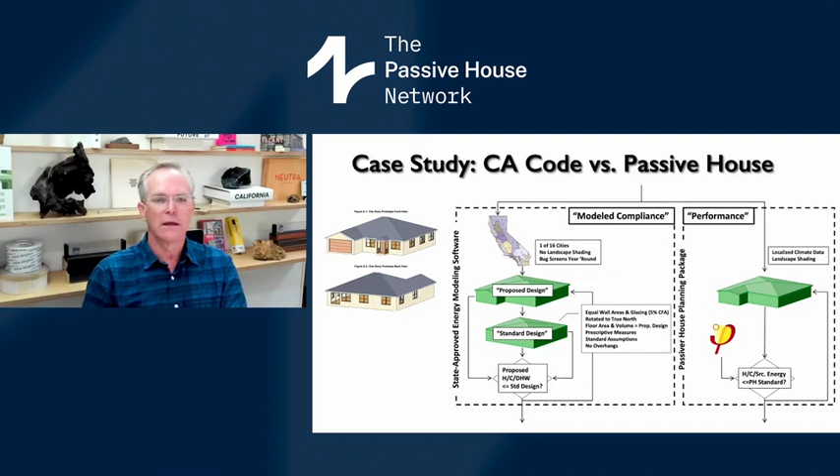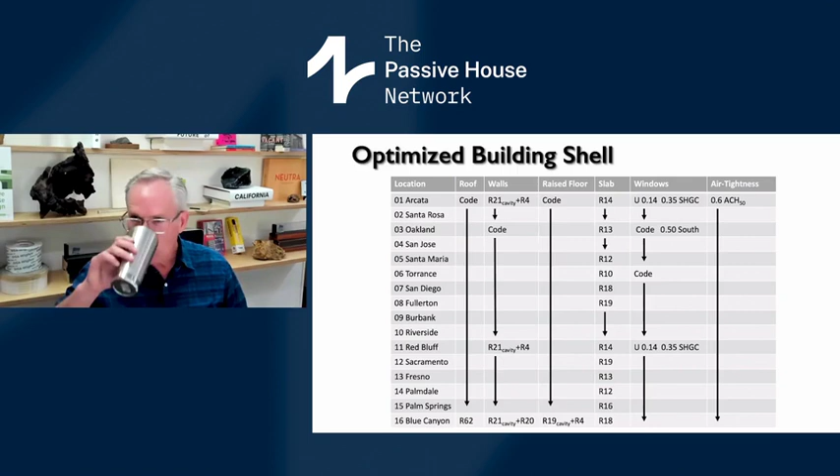This is looking at the optimized building shells. Again, there's a lot of detail here, but what I'm struck by most is how much of this was not an upgrade from code. The most consistent thing across all of them was passive house air tightness and heat recovery ventilation - there's no requirement in the code at all.

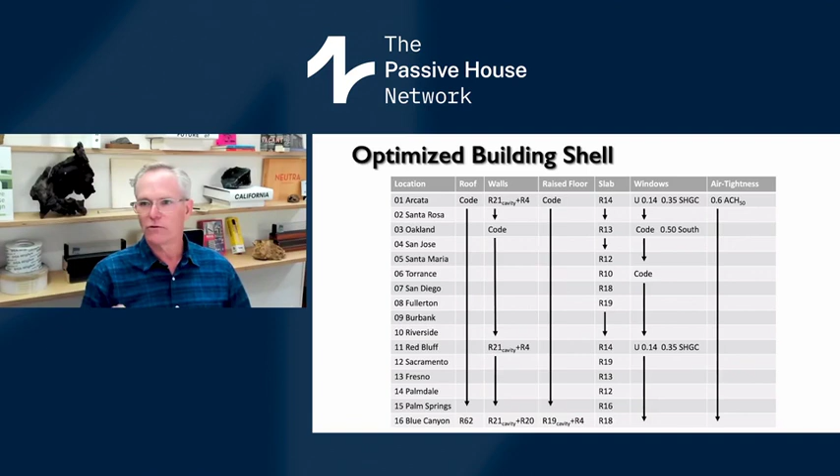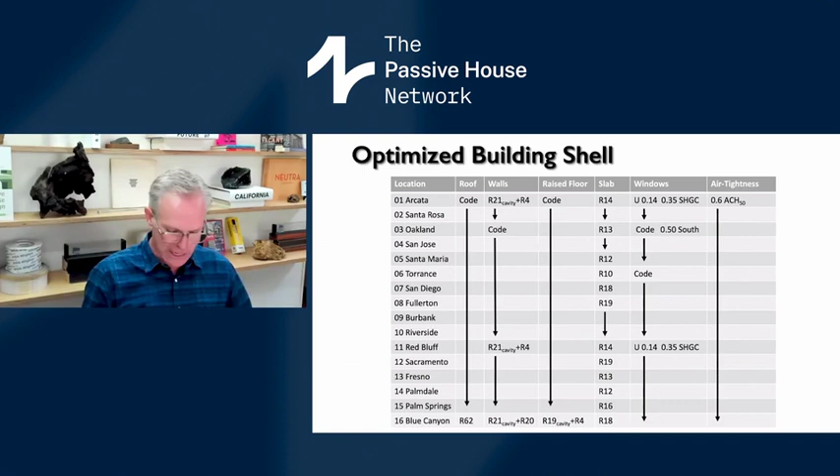Secondly, was slab insulation - those two kind of traded places. There's no requirement for under slab insulation in the code either. Those two things are pieces that would be extremely helpful in moving the code forward. And if those things are ignored, other aspects are going to continue to be tightened, but they're not low-hanging fruit, so you're going to get more and more diminishing returns with less and less improvement.

The clients took about a year before they added their photovoltaics. They wanted to understand how much energy they were using so they could size the system. And then they had some permitting issues with the batteries. So basically at the beginning of this year is when they first got their photovoltaic system up and running and grid tied.

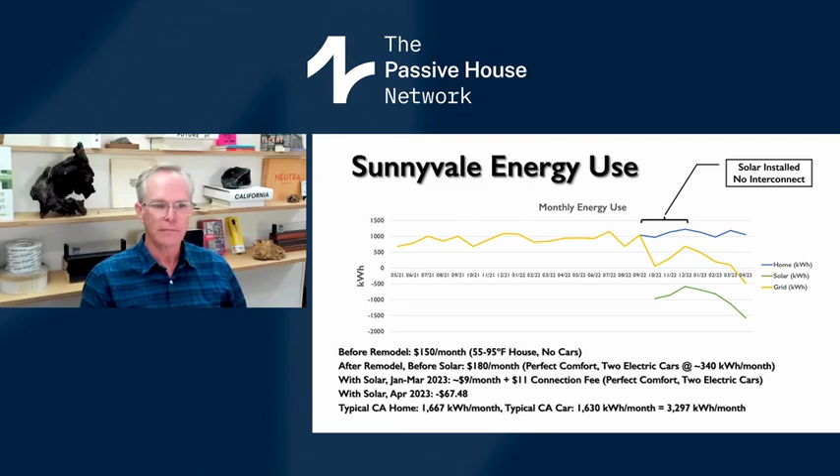And again, a comparison to a typical home and a typical car, and their peak grid draw. So in December, with the minimal solar and maximum energy use, that was 688 kilowatt hours.

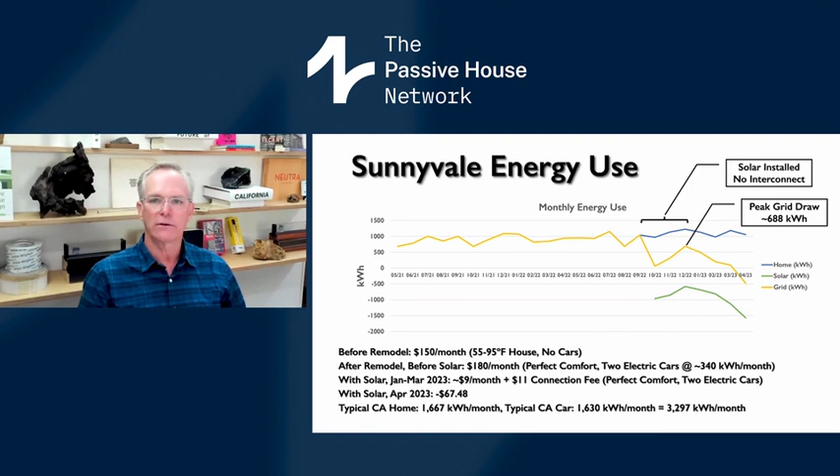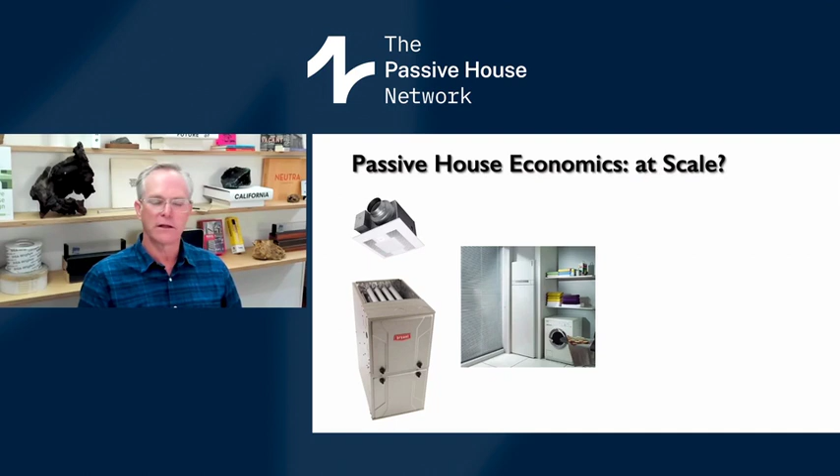So all of this comes down to the question of passive house economics at scale. Maybe if we can replace these two things with some kind of killer app like the Magic Box we've been looking for—heating, cooling, domestic hot water, and ventilation all in one, small enough that the building shell actually enables this savings—then maybe we can save a whole bunch of PV panels and batteries, flipping that first cost equation around.

Beyond that, I talked about production building being very challenging, but there might be an opportunity in producing single-family homes at scale, where the marginal cost savings could be more compelling than with custom single homes built one at a time. We'll leave that question to be answered, but I think there's a lot of potential.

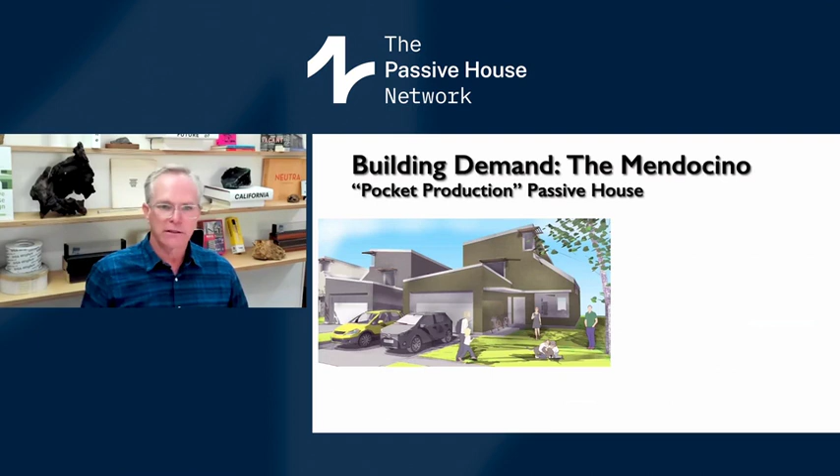Beyond that is building demand for these high performance passive homes. We focus mainly on custom high performance passive homes, but we've also been doing work on what I call pocket production passive house, or pre-designed passive house designs. They could be built in a production fashion, but also as a one-off for people who want a pre-designed building without going through the process or expense of a custom design. This one we call the Mendocino.

We developed it for a neighborhood in Northern California that was destroyed by a wildfire. It's basically 2,300 square feet, 4-bedroom, 3.5 bath. On the ground floor there's a flex space, which can function as an apartment, guest suite, accessible primary suite, den, or guest room—whatever. We're trying to make these homes visually compelling and very value oriented in terms of efficiency of space, flexibility for people, and high quality of living.

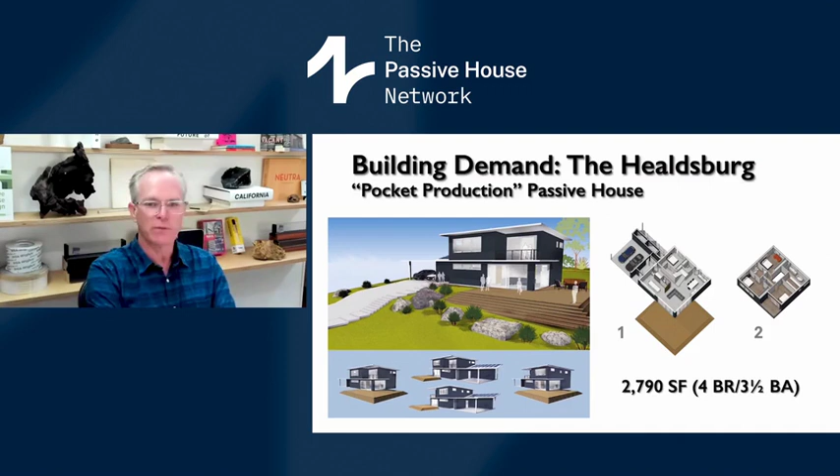Another one of those we call the Healdsburg. This one's a bit larger, with a similar kind of program. We played with the concept of the geometric perfection of the square, putting the stairs between the first and second floors exactly centered in the plan. That allows us to mirror the upper and lower floors independently of one another, so one design has 4 configurations, maximizing its site responsiveness for people reusing it in different circumstances depending on the view, etc. That's basically the end of my presentation.

Thank you for your time, and I'm open to questions.

Thank you, Graham, and thank you, Andrew. Fantastic presentation, Graham. I love the way you came at a completely different side of this from Andrew and really gave a lot of options for approaching this prefabrication and mass adoption and scaling up from another perspective. So thank you. Thank you.